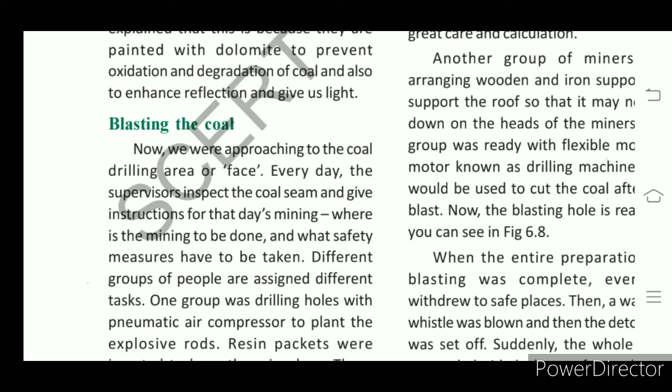Okay, so there were these teachers and some workers along with the safety officers. They approached the coal area where the coal is there. Every day the supervisors will go on inspecting the coal seam, how is the coal, and they give instructions for the workers how to operate mining that day.

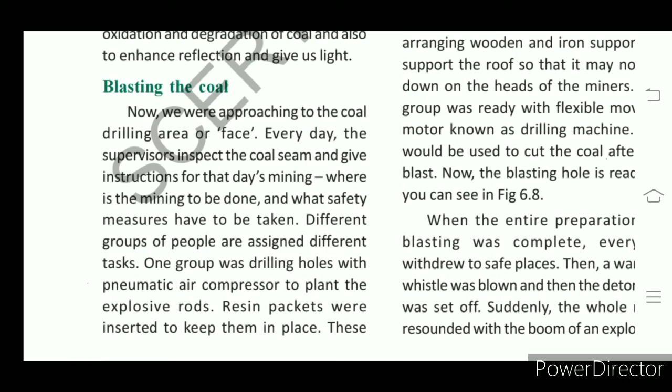Understand? That means in the tunnel where they have to start mining activity, that is extracting the coal, and how far they have to go for mining. All these activities will be given to the workers by the safety officer. Understand? Different groups are assigned different works in the tunnel. Understand? See, some are given the work of

loading the coal which is drilled out there, and some group of people are assigned the work to drill the coal, and another group of workers are given the work to arrange pneumatic air compressors, which will support in planting the explosive rods, so they make some blasts in the tunnel. Understand? So for all these activities we find different groups.

Understand? One group is for inserting these explosive rods, which help in blasting the coal in the coal seam, in the coal layer. And another group is to drill out the coal. One more group is assigned the work of lifting the coal and loading into the wagons. Okay, and wagons will run with electric power on the railway lines arranged in the tunnel.

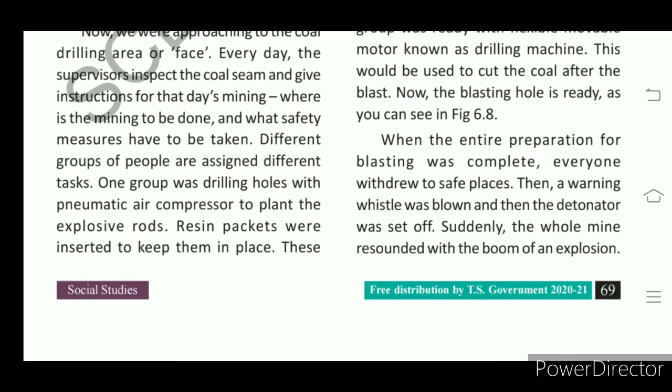Okay, after coming to the entrance of the tunnel, from there it will be lifted to the ground level. Understand? So like this, different works are assigned for different groups of people. Understand? And in the holes created by one group in the tunnel, in those holes they arrange explosive rods.

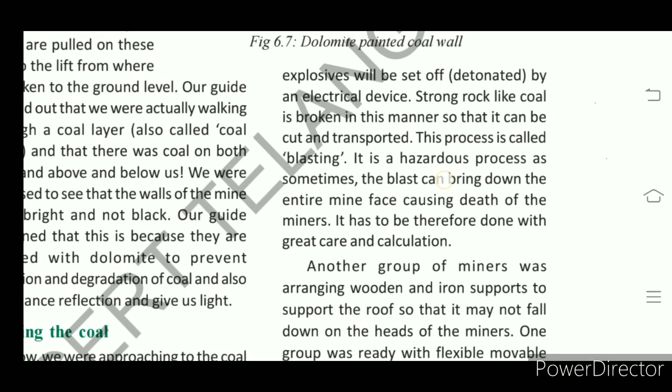Understand? They will set off explosive rods by an electric device. Understand? Thereafter a strong rock like coal will break. After that they will go on transporting the coal. Understand? So here by arranging the detonators, in the next figure I'll show you that one. So stronger rocks like coal, that means how the rock is strong, in the same manner coal is also

strong. The coal seam in the coal layer, they are in the tunnel where they are surrounded by coal. Okay, that we can call coal rock. That means as rock is strong, coal also is strong. So in that coal layer they arrange the explosive rods, and they blast it. Understand? So the process of arranging the explosive rods in the coal seam and breaking it is called blasting.

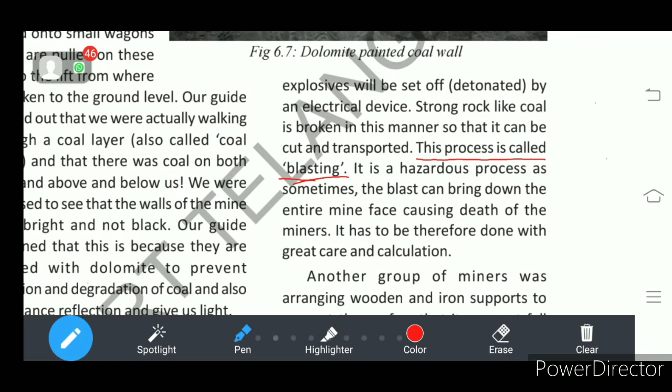Understand? So here it is there. Understand? What is blasting? It is blasting here again. This process is called blasting. What process is called blasting? The strong rock like coal is broken with explosive rods. The strong rock like coal broken with the explosive rods is called blasting. That is the definition of blasting.

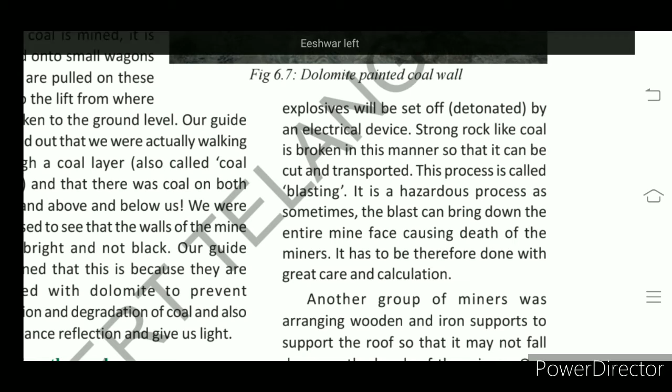And it is a hazardous process, dangerous process, that is blasting. Sometimes this blast can bring down the entire mine. That means the total tunnel may collapse with the blasting. So what happens when the tunnel collapses? All the workers who are in the tunnel will die instantly. So it is a hazardous, that means a dangerous process, that is blasting.

They should be aware of how much intensity should be created with the blasting. Okay, that means it should not blast the entire tunnel. So how much power of explosion is needed, that they should know. Then only they can get the coal. Otherwise it leads to death of all the workers, that is all the miners who are in the mine. So it is called a dangerous process.

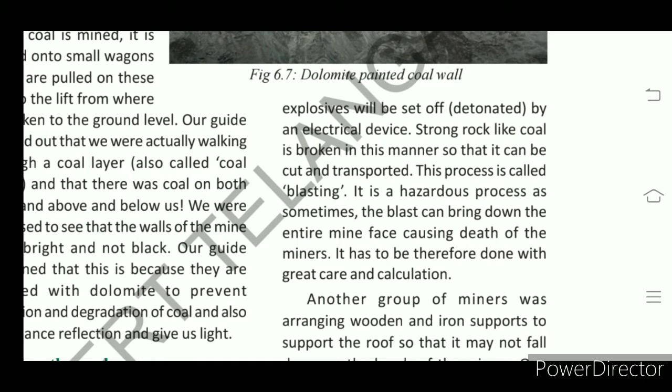So it has to be therefore done with great care and calculation. They will calculate how much energy, that means how much power is needed, how much quantity of explosive material should be inserted into the holes created in the coal seam. Understand? That is the work of one group. Understand? And another group of miners,

they arrange the wooden and iron supports to support the roof. See, when one group is blasting the coal seam, another group will go on arranging the wooden or iron rods to the roof. Understand? Because due to the blast, there may be a chance of the roof also collapsing.

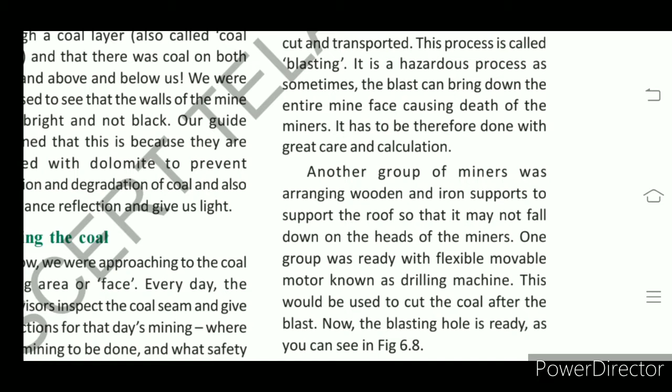So though they are perfect in blasting, it is essential to take the precaution, so one other group will go on covering the roof with iron supporters or wooden supporters, so that the roof does not fall on the heads of the miners. That is a second group. Understand? And one group will be ready with a flexible movable motor. There will be a motor for drilling the coal. Understand?

So one group will go on, moving with a motor, that is called a drilling machine. Okay, and this drilling machine is used to cut the coal after the blast. Understand? So in that way, each group is assigned some specific work.

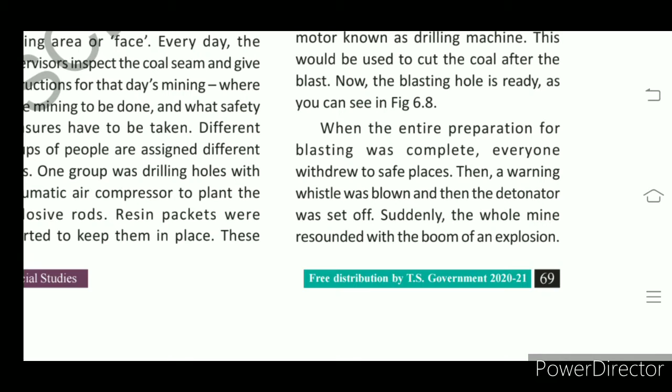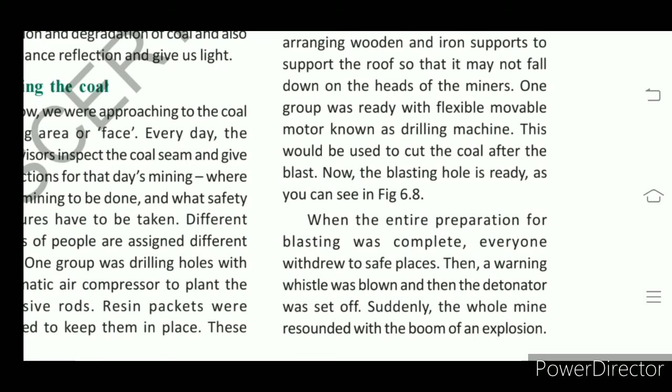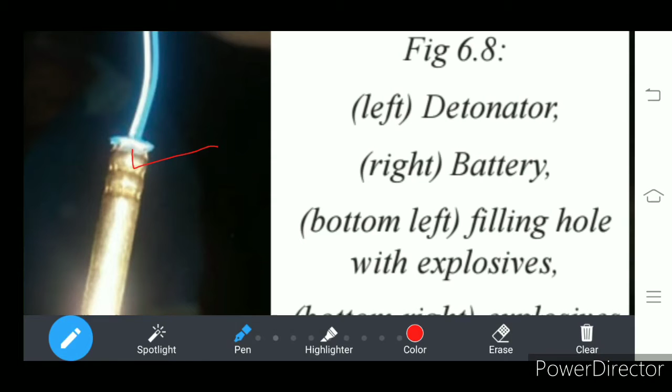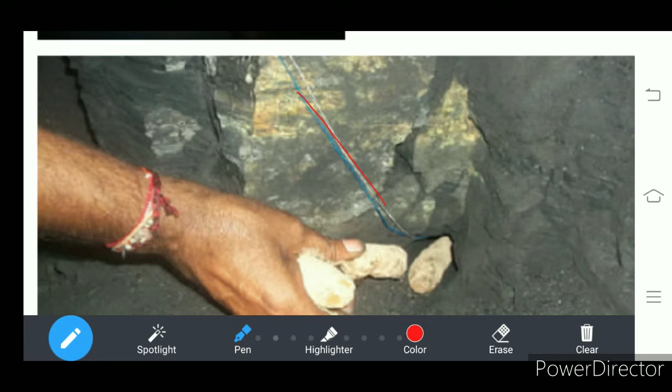Okay, on another side, you will see that there is a battery also. Here you see, this is the battery. With this battery, two wires are there, and these two wires are connected to the explosive material. I'll show again to you. Okay, this is the explosive material. See here, have you got it? These two wires are connected to the battery here. I'll show you again. Here it is. This is the battery, understand.

So this is one blasting team, we can say it is a blasting group. So the blasting group will go on blasting the tunnel. They are experts. They arrange the explosive material required for creating a blast to extract the coal. If they fail in the calculation of arranging the explosive material, then it may lead to the fall of the entire tunnel. So this process is very important. At blasting time, they will do this work with great care and calculation. This is the work done by that team.

So when the entire preparation for blasting is completed, everyone will move out of that place. They will go to the safety place and stand. First they arrange the explosive material, then they go for blasting. So if it is ready for blasting, they tell all the members in the tunnel to move to safe places. So after arranging this explosive material, they go to the safety place.

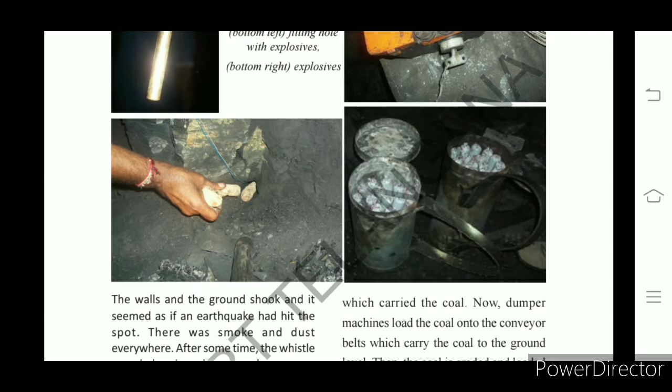Look at this figure. Here it is explosive material. Bottom right, this is about explosive material. See in the buckets, what is there? All these are explosive materials, and they insert them into the hole. So in this way they go on creating the explosion. And another thing, the walls and the ground get shaking like an earthquake. When the bomb explosion takes place, the entire spot shakes, vibrations come like an earthquake. And smoke and dust also release everywhere in that tunnel.

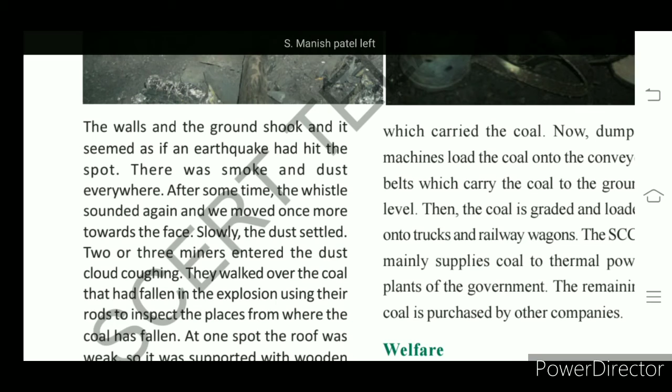After some time the whistle sounded again and we moved once more towards the face. That means again they'll give the whistle. After the dust settles down, they give one more whistle. So two or three miners enter into the dust cloud, coughing. As the miners are there, they have to go for drilling now. As the dust and smoke release there, two miners enter into the cloud coughing. It is covered with smoke, that is called a dust cloud.

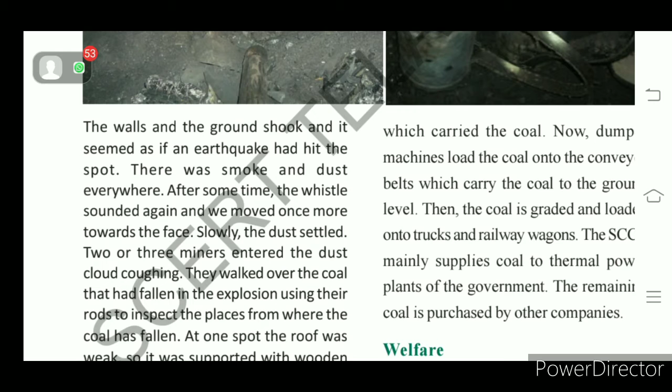As they move in that dust cloud of coal, they inhale that dust, so they get a cough. And they walked over the fallen coal, using their rods, and inspect the place from where the coal has fallen. Understand?

At one spot the roof was weak, so it was supported with wooden beams and posts. Wherever blasting occurs, another team goes inside to check whether the surroundings after blasting are proper or not. If anywhere they find the roof is weak, they arrange wooden beams and iron rods to the roof so that it could not fall. This is the work of another team.

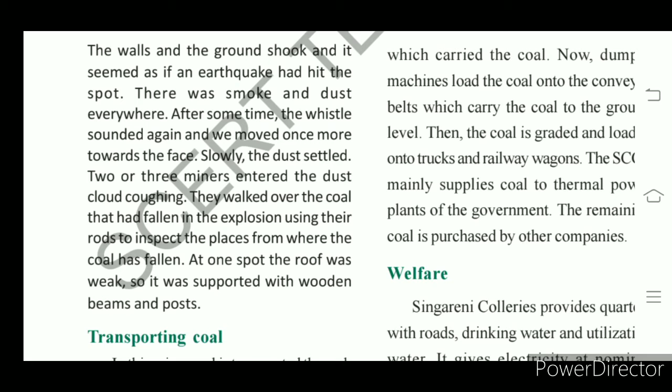Next is transporting the coal. In this 21 incline, the teachers are giving us information on what they experienced. The coal is transported from the blasting area to the entrance of the tunnel using a conveyor belt. Earlier, before the conveyor belt, using railway tracks, miners only carried the coal physically on their backs, using baskets on their heads. But today machines are used, and technology has developed very much.

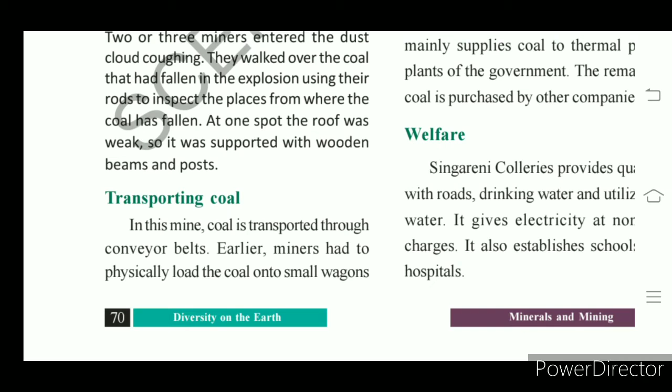Today the miners use wagons which run on the conveyor belt. The miners take out the coal and load it on the conveyor belt. The coal pieces move on the conveyor belt up to the entrance of the tunnel, where it is loaded into the wagon. That wagon is lifted to the ground level. This is the process of transporting the coal.

This coal is dumped into dumper machines, which load the coal onto the conveyor belt that carries it to the ground level. Then the coal is graded and loaded onto trucks and railway wagons. The Singareni Collieries Company Limited supplies the coal to thermal power plants.

What is a thermal power plant? It is a plant where power is generated using coal. By burning the coal, power is generated—that is called thermal power. So coal is supplied to the government thermal plants. In our Ramagundam area, we have NTPC, the National Thermal Power Corporation.

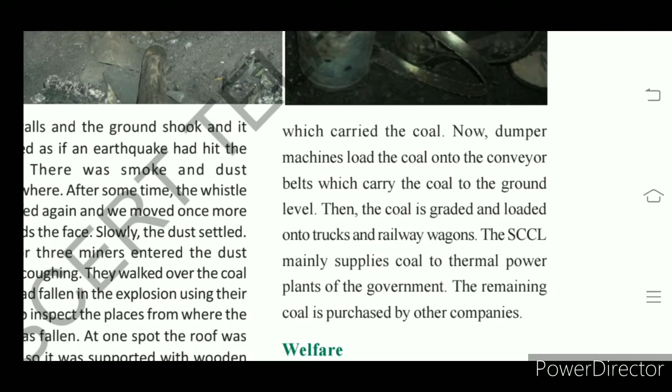Then the remaining coal is sold to other companies. This is about transporting and selling the coal to other companies.

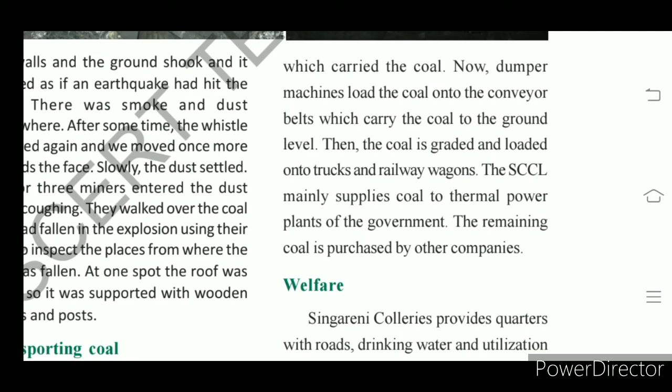What welfare measures do they take for the workers of the Singareni Collieries? Singareni Collieries also provide quarters where the mines are, and that is free of cost. In the quarters, drinking water is free, and power supply is also free or available at nominal, very low charges.

They also established schools and hospitals for their children. Singareni schools are there for all Singareni workers, providing education to their company workers' children. And for hospitals, if something happens to them, those workers and their entire family members will utilize the hospitals tied up with Singareni. This is the welfare work they take up.

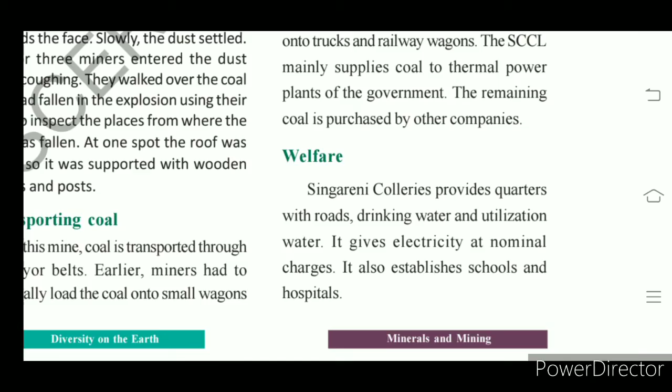Safety and health checkups will also be there for all the workers. The Director General of Mines Safety monitors the safety aspects regularly, and workers periodically go for medical examinations. The workers underground are not only exposed to accidents, but as I said, after the blast they have to face the smoke and dust.

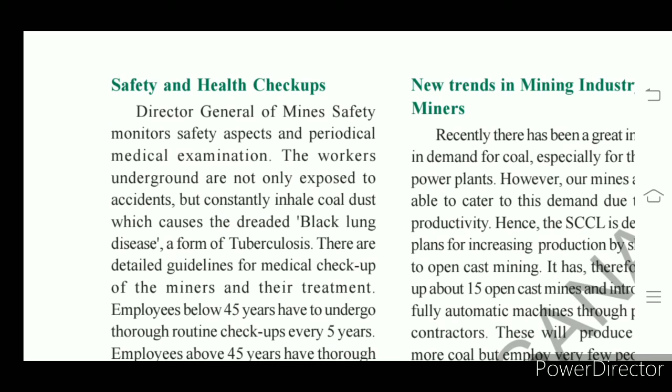While inhaling the air, coal dust enters into their lungs, so their lungs turn black. This black lung disease they face is a form of tuberculosis. This is a disease that they will get.

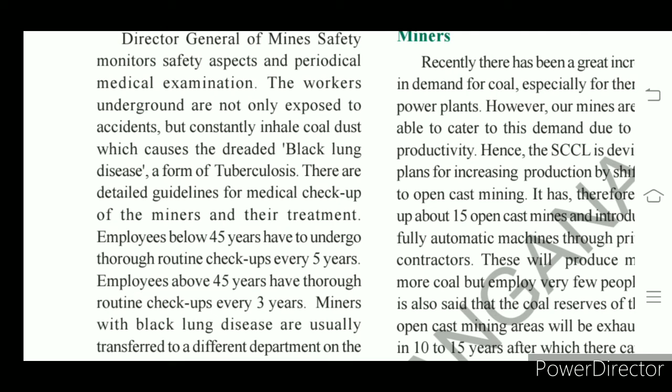So periodically they go for medical examination. There are detailed guidelines for medical checkups of miners and their treatment. Every worker below 45 years of age has to go for a routine health checkup every 5 years, and those above 45 years go for a routine health checkup every 3 years.

Miners with tuberculosis, that is black lung disease, are transferred to another department—meaning those suffering from lung diseases will not be allowed further into the tunnels. They will be shifted to another department, assigned work at the ground level, as they are not allowed into the tunnel. In this way, they take welfare measures for the workers.

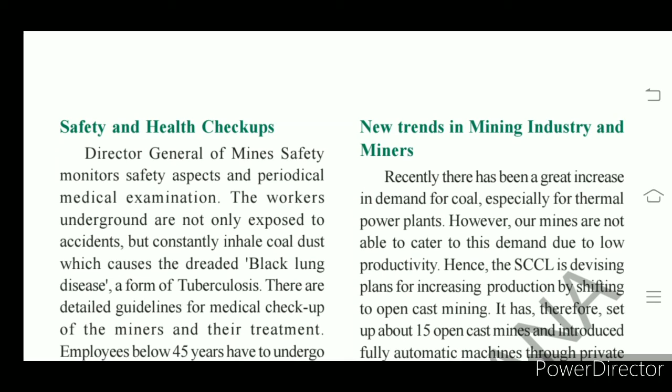In the next class, we'll look at new trends in the mining industry and miners.